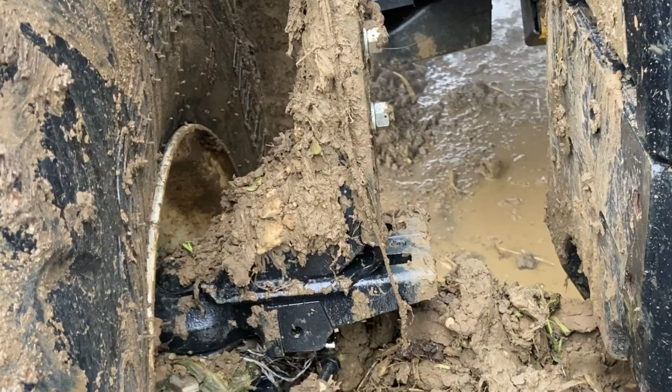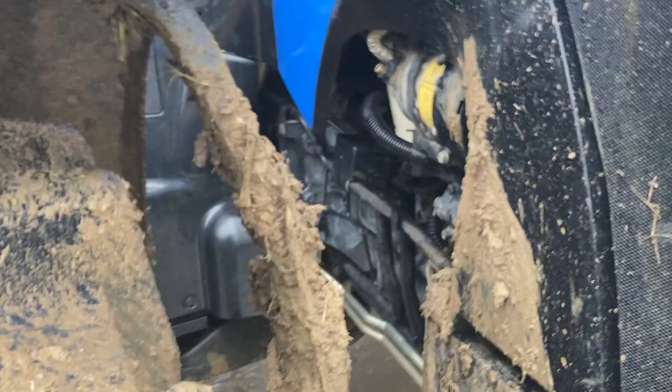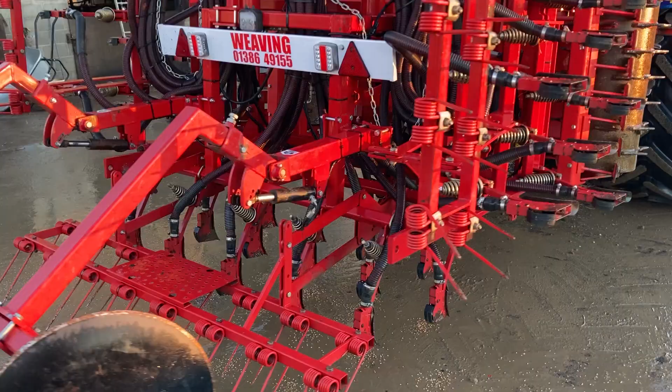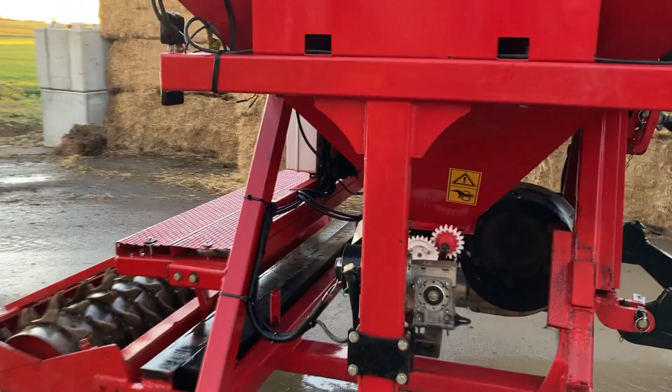It's looking a bit cleaner now. Took me several hours to do it. You can see the sun flashing through there, it's not far off setting now. But yeah, there was a lot of mud on there.

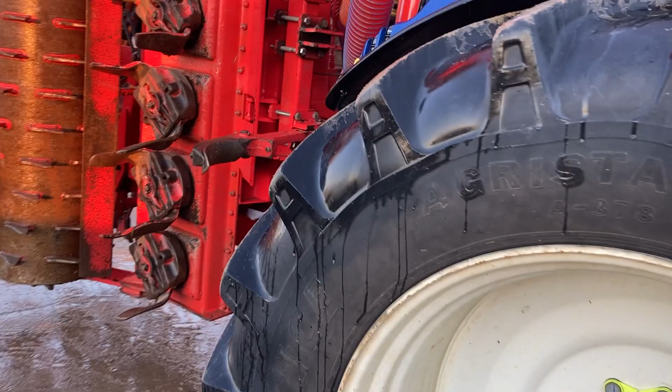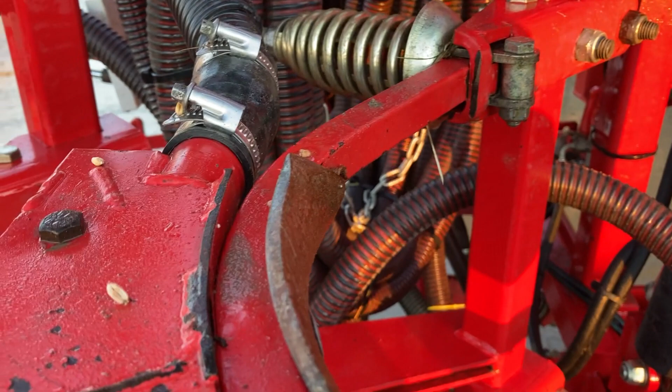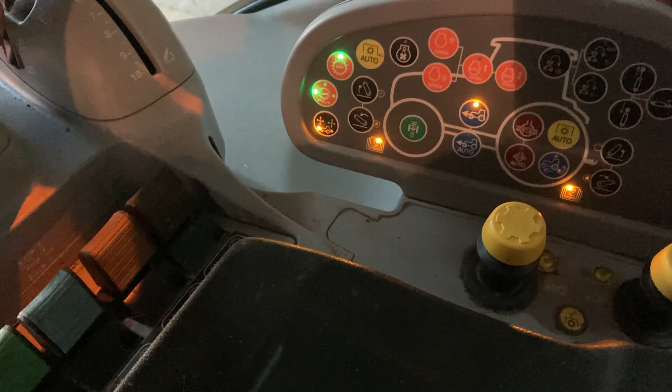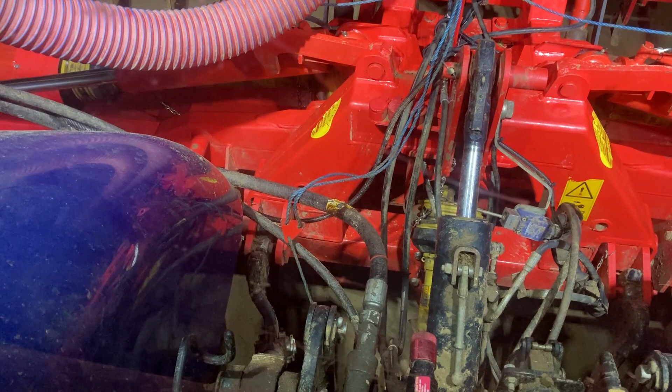Right, I've got to change the oil in the gearboxes on the power harrow. So I'm just lifting it up so it's off the ground. I don't want it right up because it's not good to run the PTO at an angle. Just so it's off the ground, lift the drill up and then drop it down so it's actually not on the ground, but so the actual tines aren't touching. Then put it in.

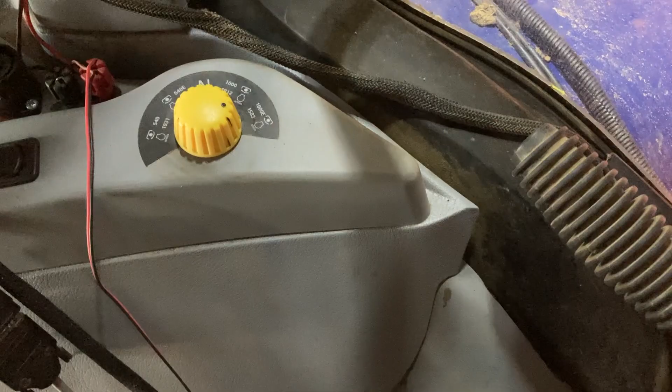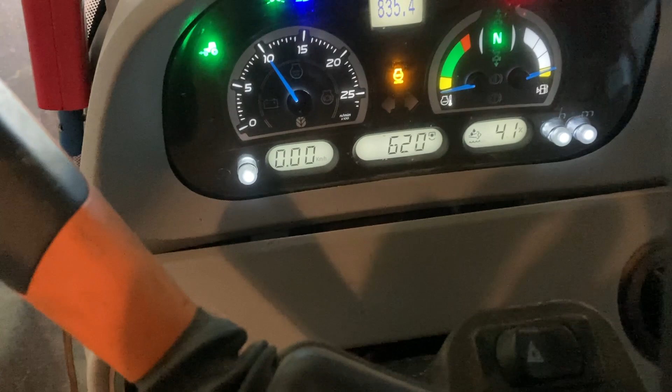So I can stop it and drain the oil out the plugs.

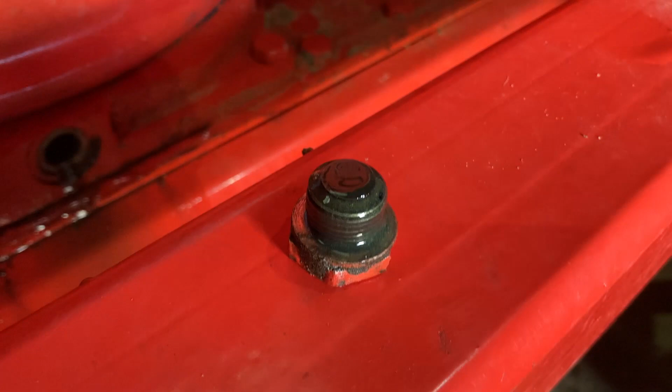This is the bung that goes in the bottom there, and on the top there, that top bit is a magnet. So if you get any iron filings or anything off the gearbox, you can check it to see if there's anything on the top there, but that one doesn't. That one's clean. There's nothing on here. It's just a little bit of the oil on there.

It's been draining for about half an hour, so that's okay now. Just got to clean up where the oil's been running down.

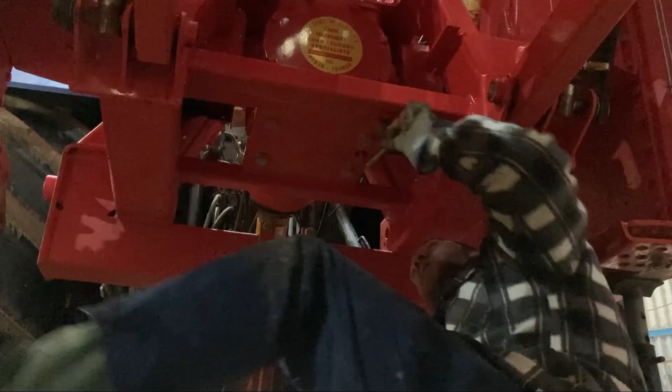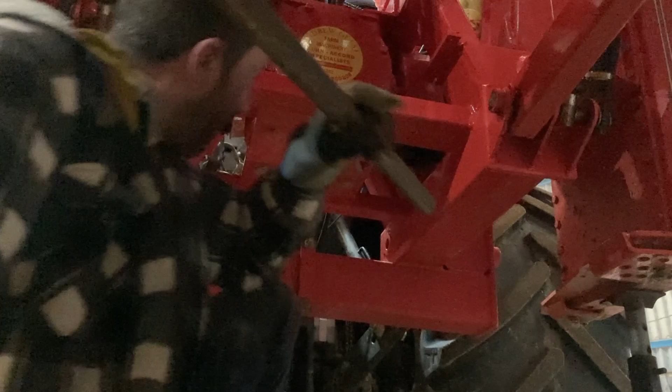No. Right. Try again. That's good. That's cracked. Let's go. It's tight.

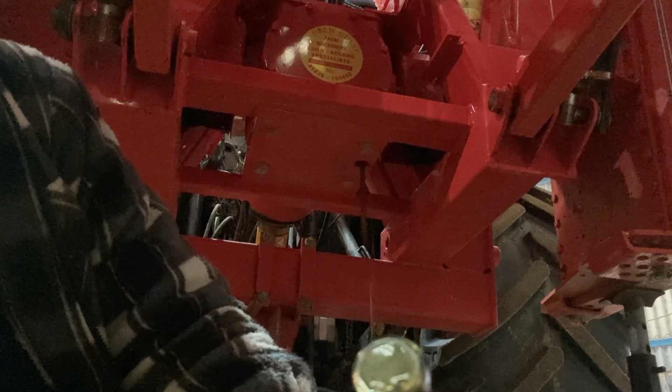Yes, we are. Right. Pop underneath. There we go. There we go, look at that. It's clean as anything, there's nothing on that magnet at all. It's absolutely fine. Oh, actually doesn't look as dirty as it did in the other one.

Right, the oil's all drained out now. So now put this nice clean bung back in. There we go. Nice bung in.

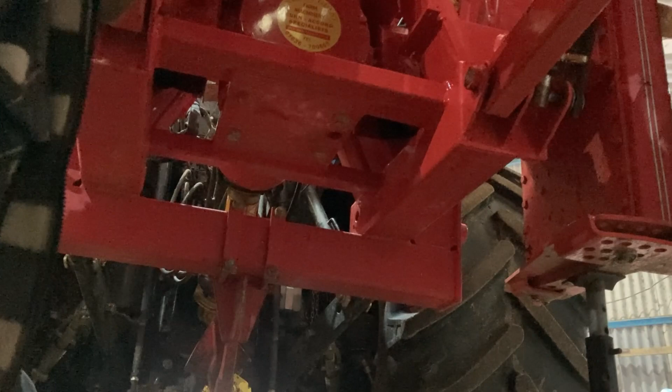Right, I've taken the side one out. I've now got to get the top one out to top it back up, but I think I'll take it down, unfold it now, because it's easier to get at the top when it's not folded. If you look here, you can see I've got the axle stand here. There's another one, where is it? There, supporting it. So it's safe for me to be under here.

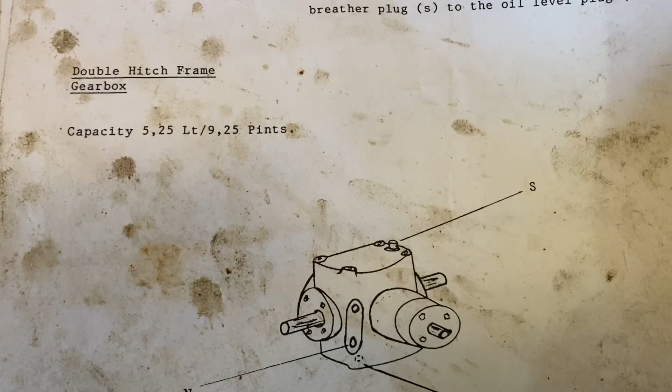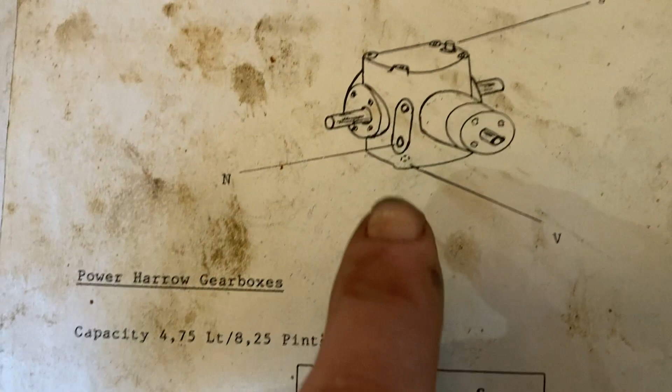I need 5.25 litres in the main gearbox. And then 4.75 in that gearbox. But you have to, the drain plug on this one here is at the bottom, which you saw me take out earlier. I've taken this one out here, which is the level plug. So basically you put the oil in until it comes out about level.

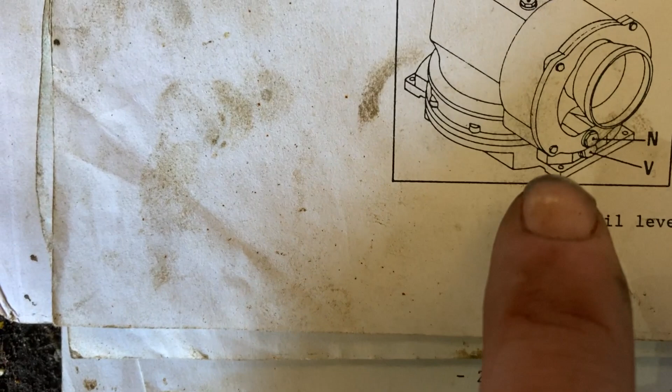So I've got to remove the one on the top. And then, so it should be about 5.25 litres for that one. And this one, there's two of these. This is the end gearbox.

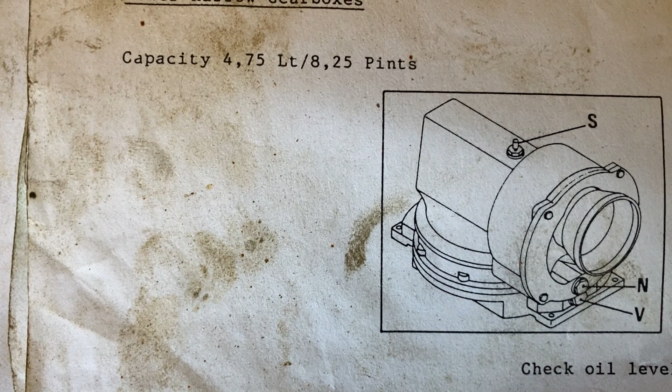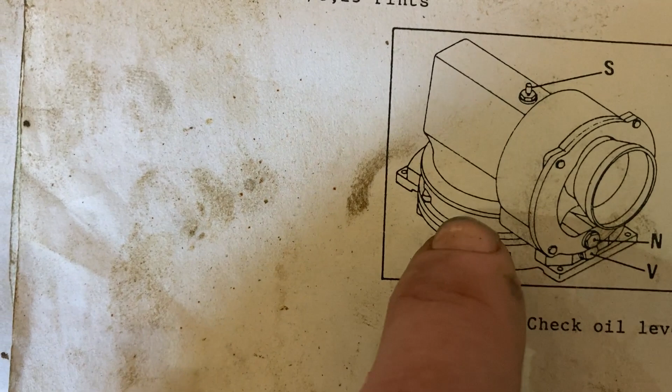I've taken the drain plug out, which is, this gearbox is slightly different to the one I've got, just where the points are. That one there is in the same place. This one here, the level plug, is actually on the side round there, and the drain plug is also on the side. But basically you have to fill them up till they come out of the level plug on that gearbox and on that gearbox. Right, now putting the oil back in.

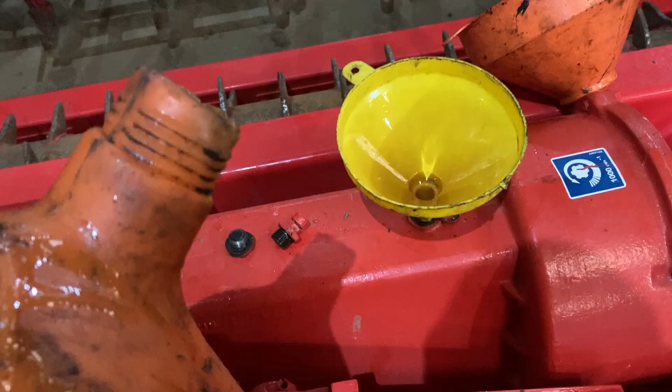I've put the drain plug in. I've got the level plug out. So just keep pouring it. It's 4.75 litres in this one because this is a side gearbox. So that's what I've put in this container, so it should be about that.

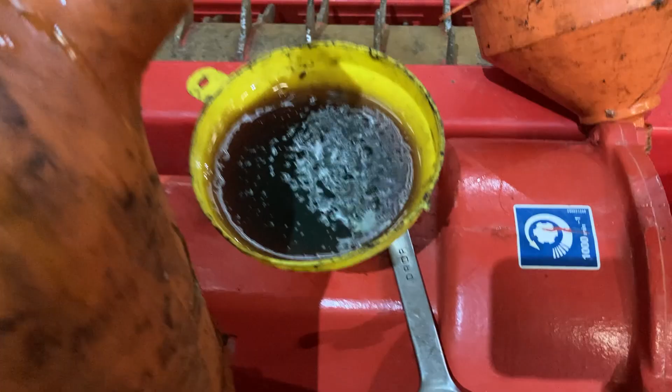But the problem is you can see it going in there. It's very thick oil, and because it's a cold day, because this is gearbox oil, 85-140, so it's very thick. So it's taken ages to go in, which is why I warmed the gearbox up when I drained the other one out, so it will come out quicker. And I've got the biggest inlet I can get. I can't get anything bigger, I only just got that in, but no, it's going very slowly.

Oh, there we go, it's now coming out. Let's put the level plug in.

Do it up, it's not very, not much room in here. Rag will clear up the oil, so we won't clear up everything, the dust and that will stick to it, make a mess.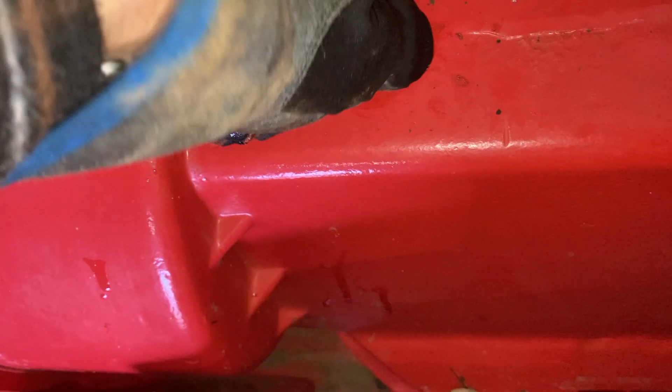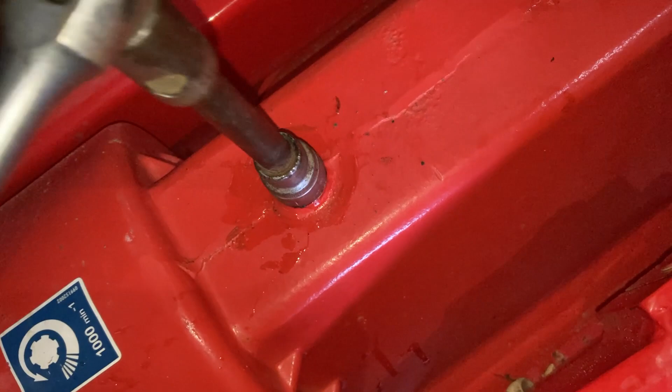There we go. Put this back in here. Tighten it up. There we go. Gearbox done.

Right, I'm now filling up the middle gearbox, which is the bigger one, 5.25 litres, so that's what I've got.

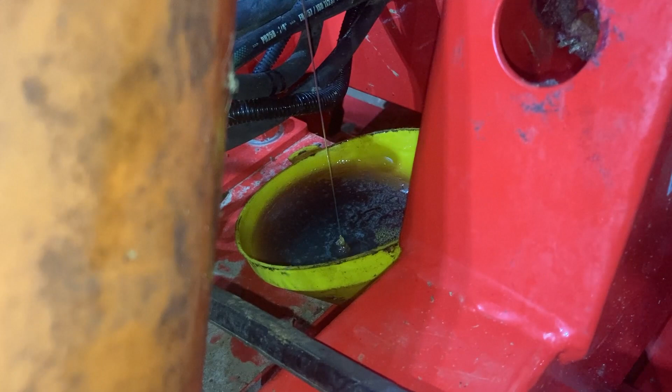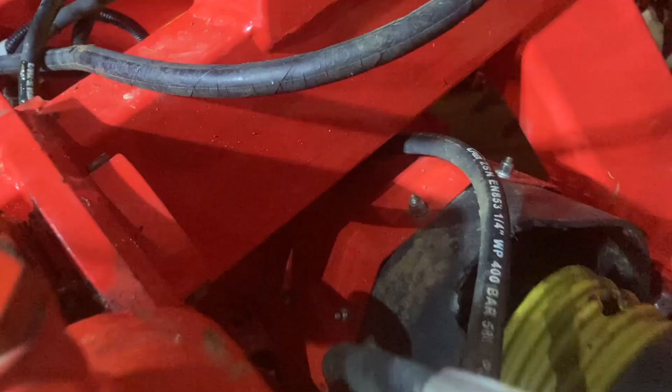But as earlier, it's going very slowly. I've got the bung in the bottom and the level plug out, which is on the side of the gearbox. So you can see it's just started to come out, so I'm now going to put the bung back in.

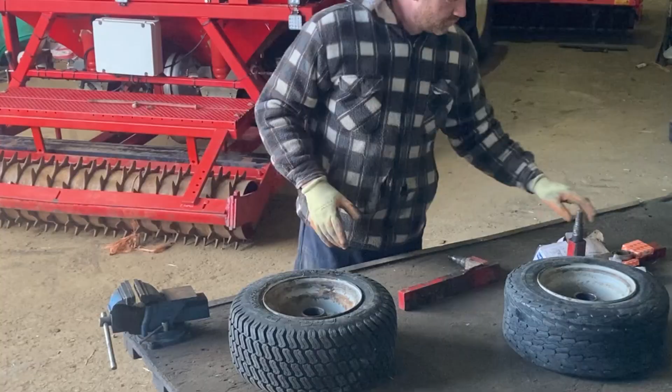Guys, I've got the wheels here off the drill, which you can see behind me, and the bearings are totally shot. Now on the last one of these tines on this...